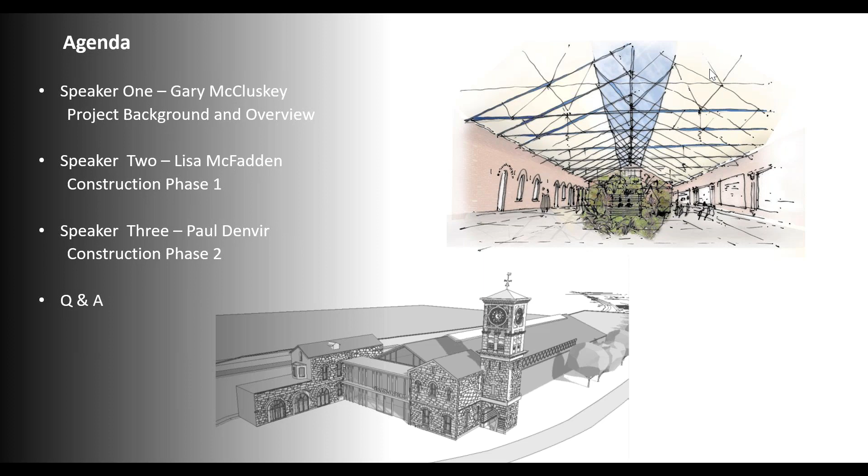So the agenda for tonight: I'm speaker 1, and I'll give you the project background and overview. When I'm finished, I'll pass over to Lisa McFadden, who will take us through construction phase 1. Following on from that, Paul Denvir will take us through construction phase 2. There'll be a flyover and walkthrough of the building as part of Paul's presentation, and then we'll have a Q&A session. So just to give you a bit of background, to give you an understanding of the lay of the land around the site, we've included this slide.

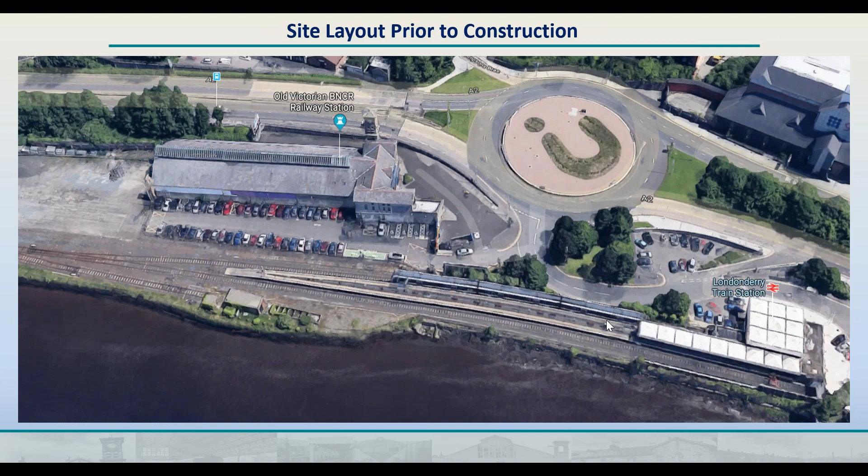Looking over towards the right-hand side, you can see the old station as it was, with all these sort of permanent roofs. You can then see this was an island platform with line 1 running up along here next to the River Foyle, and line 2 - you can actually see the 3-car sets in there. This was the S&T, the Signalling and Telecoms relay room, and then this was the remains of an old tank farm that we had up there at the time, which led to a bit of contamination in and around this part of the site. And then you can see there's an old siding coming into that area as well. So that's just an overview of the site before we started any of the work.

So I'll just give you a bit of project history and a timeline here now. In 2010, TransLink were approached by Ilex to commission a joint study on the future location of the train station.

At that stage, there was no huge big aspirations for us to relocate the train station anywhere, but we did jointly commission that study with Ilex, which then led on to us in 2011 initiating a project mandate. We appointed a number of designers to prepare outline designs to see where the best location would be, and as a result we came up with a number of options which we took to public consultation.

In the latter part of 2012, early 2013, following the public consultation, that led on to us looking into establishing what we'll call a proper project, where we set up the program sponsorship group in 14-15, and then in 2015 we appointed a fully integrated design team. In 2016, we submitted an outline business case for £27.5 million, and we got approval for that.

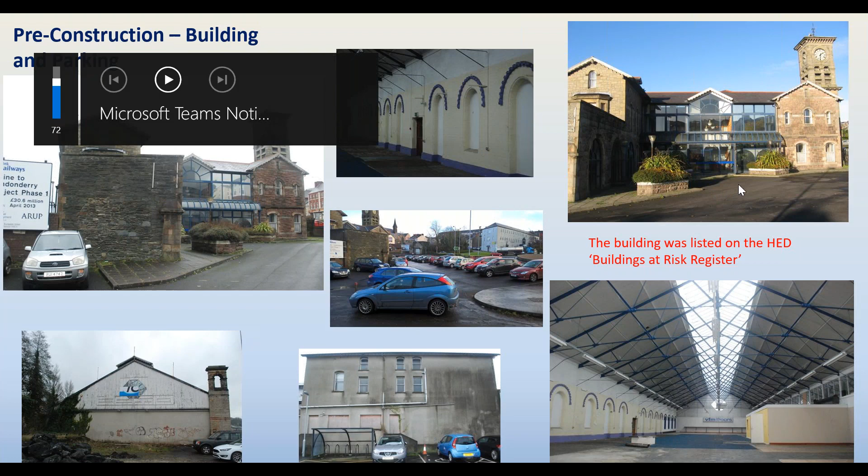And then if you look at this central photograph, you can see there were cars illegally parking, driving up over the footpath and onto the forecourt of the old station. In that top right-hand corner, I counted 25 cars parked in there one day. And then this is the back elevation that was open, as you've seen on the previous slide, where the trains and the platforms used to come into the building. So it was definitely in need of a lot of work.

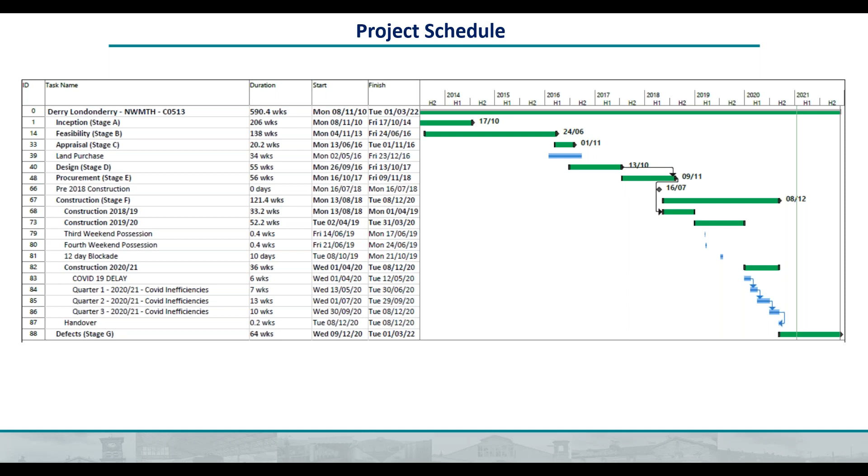I won't go into the rest of that because it'll be happening in Lisa's and Paul's talks later on in the presentation. Just looking at the procurement strategy that we agreed on for the professional services, as Katherine was saying in her introduction, this was a huge multidisciplinary team with an awful lot of elements within it.

So the procurement strategy identified an integrated design team approach to manage multiple professional services. There was a two-stage procurement process, PQQs and ITTs. It started off from principal competition and then went on to secondary.

So McDonald were appointed as the integrated design team economic operator. The decision was made at the time that we wanted as many professional services within that overall IDT team as possible. That even included all the surveys associated with planning applications and building control, and whatever else was needed to get a fully detailed package to the main contractors and then to tender.

So as I say, McDonald were the overall design team leaders. They carried out structural, civil engineering, mechanical and electrical engineering, S&T designs up to GRIP stage 4, permanent way designers. They were the NEC 3PM, they were also the NEC site supervisors, and they carried out the Novo Devo through their sister company, MRA.

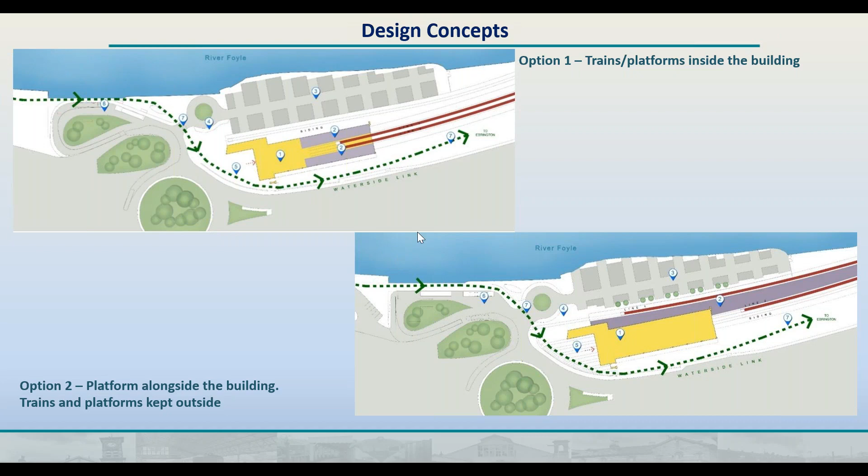So we considered and appraised them both. I'll go on to the next slide — oh, I went too far, sorry, let me go back here.

As part of this scheme, we wanted to open all of this up as much as we could, which gave us the opportunity to incorporate a bus turning circle beside the station, which we never had before, because you could never take buses in due to nowhere to turn them. There was an awkward single-lane entry to the front of the old station, so during peak times with high passenger numbers, there might have been 2 or 3 buses sitting around blocking up this road. This allowed us to create an entry into the site with an internal turning area, where you can come in, turn, and passengers can be dropped off or picked up without blocking up the whole of the park and ride.

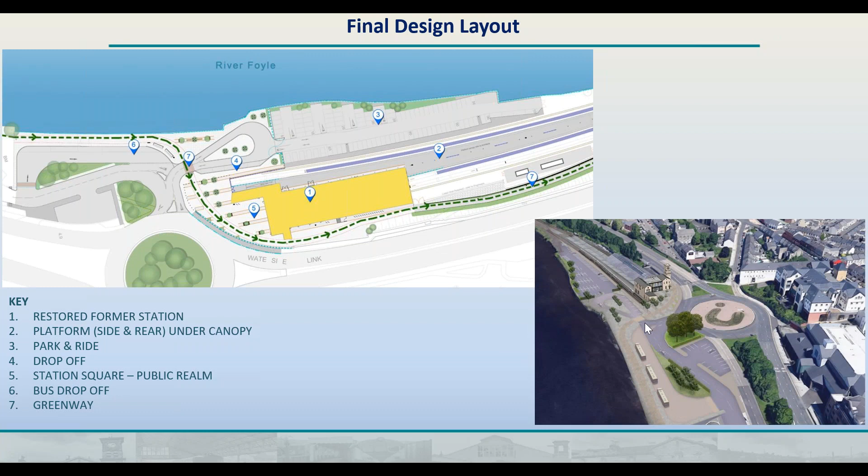As I was saying, this is a Grade B listed building, so we were fairly constrained in what we could do here. We had to keep all of the external walls as they were. So the external envelope of the building, with the exception of this front infill bit, is all as it was - we just cleaned it up, repointed, and fixed windows and things like that.

The design keeps the active travel towards the front so people could come in and out without having to go through the main part of the building. When you enter, we located the cafe here to maximise the views out over the River Foyle, with the food prep area, and then this is all back of house for NIR staff, because we need direct access in and out of the platforms for obvious reasons.

And then down here we have the toilets - a disabled toilet, a parent changing room, a changing places toilet, male and female. And again, there's another active travel unit there with direct access out onto the Greenway.

And then we have this huge area down at the back of the building where we included 2 internal planters - you'll see some photographs of that later in Lisa's presentation. There's a big area down at the back here used as a passenger waiting area, but it can also be converted for public events, with flexibility in terms of services, water, power and electric.

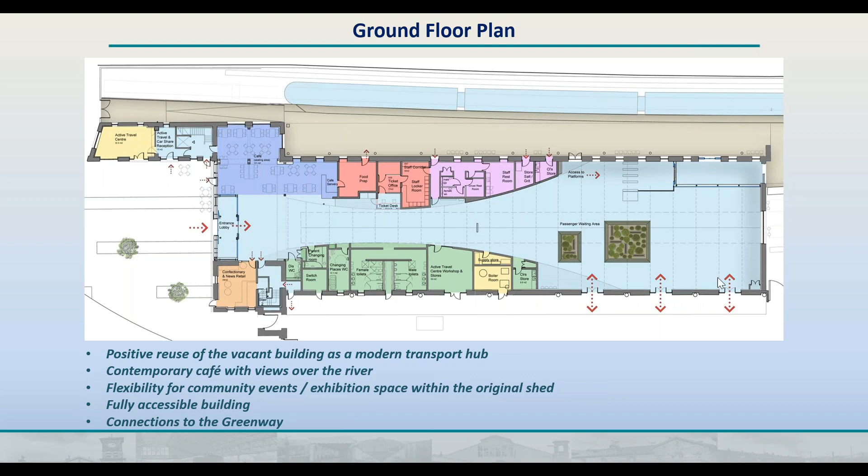And that can be used, and just before COVID it was fairly well used actually. And then we've got these set of 3 doors here with direct access out onto the Greenway.

So this is the overall layout for the Greenway path itself. As shown earlier, it's coming down at the back, the new bus turning circle along the front of the building, down along the side, down along the bottom of that embankment to the Waterside link road, and then right up here, connecting into the existing Greenway in front of Ebrington. So we were able to move the Greenway away from where it was, up at the top of the dual carriageway, Waterside link.

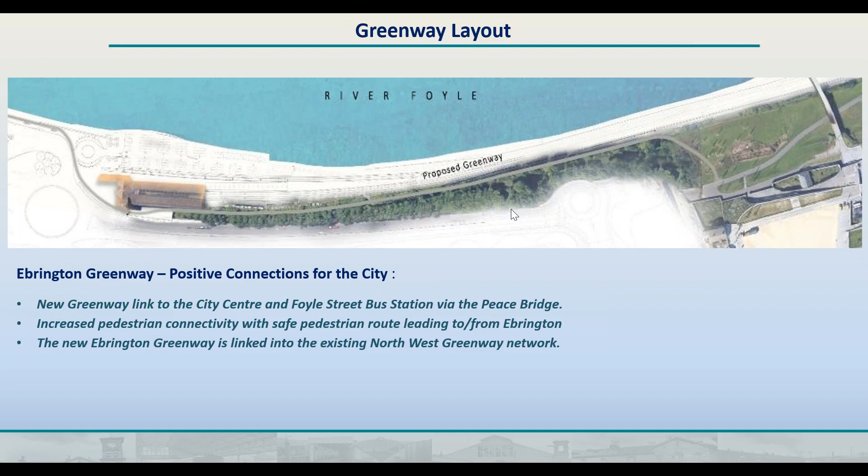Moving on to the huge amount of public and stakeholder consultation carried out within this scheme. This was a fairly sensitive project with an awful lot of interest in the North-West area. As I mentioned earlier, in 2013 we carried out a public consultation and got almost 1,500 responses - 92% of respondents were supportive of implementing a new train station, and 64% were in favour of refurbishing the old vacant station.

We included 4 overall options within that public consultation. One was to refurbish the old station - not the original, but the one we actually demolished that I was showing you earlier - or to build new. The other was a new contemporary option, and then there was another elevated option over the top of the railway lines, at the side of the Waterside link dual carriageway. But by far, refurbishment of the old vacant station building came out as the most favourable option.

In 2016 to January 17, as mentioned earlier, we carried out another full public consultation on the preferred option we were going to submit to planning. 98% again supported the principle of a new North-West Multi-Modal Transport Hub, with 92% agreeing it was appropriate to reuse and refurbish the former Waterside train station.

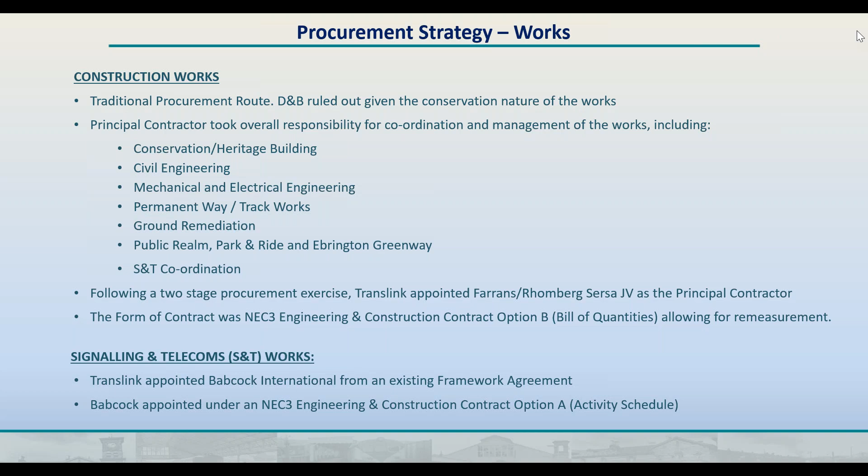So that just brings me nicely into the start of the construction works on site, phase one, and this is where I will hand over to Lisa McFadden.

Thank you, Gary, and good evening to everyone. I'm going to give a short overview on the construction phase when I worked as project manager. This was really from October 2018 to October 2019 when we commissioned phase one and went into operational use.

The 1980s insertion with modern glazing at the front, with art at the backdrop, helped showcase that this is a modern transport hub for today's use.

Also, through inception stage, there were changes such as new legislation or new standards of ways of doing things. For example, we introduced a changing places. Also, we looked to retain the modern elements that we had to provide, fit for use for today. This includes retail opportunities like a cafe overlooking the River Foyle and the city beyond. And what we touched on earlier is a key feature was a flexible community space within the passenger area at the back of the station.

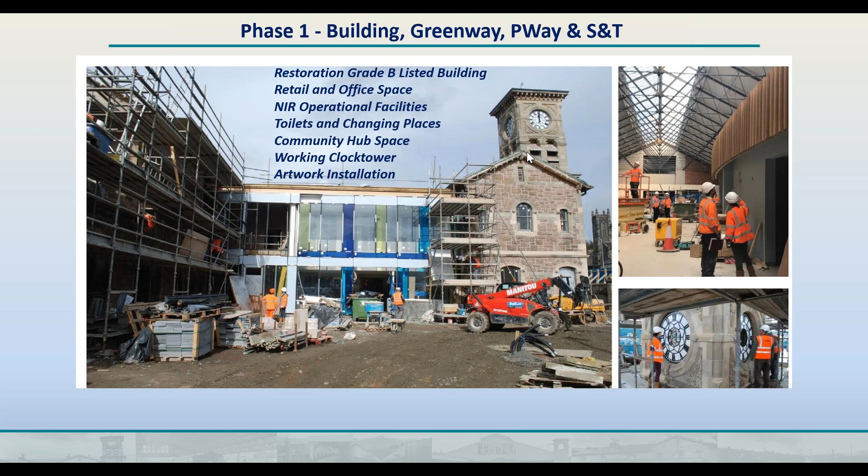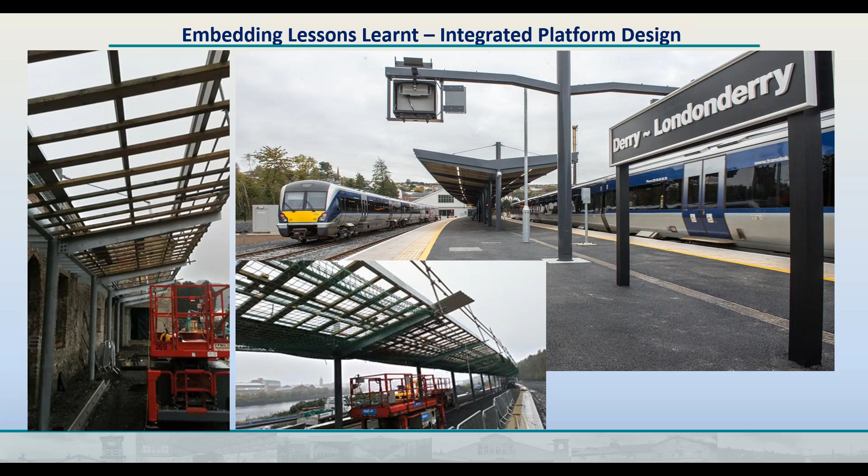However, making the canopy work, we had to step around the building and integrate the M&E services with bespoke down pipes. So as a construction team and delivery team, we really had to work together to make something very clunky from a joinery and construction point of view look elegant at the very end.

It wasn't just a building project in phase 1. There was a lot of PWay, which is track works, and S&T works, delivered by Babcock. The PWay was Rhomberg Sersa and the S&T was Babcock. We had 1.8 kilometres of new track to lay.

There was 6,000 metres cubed of spoil, and 6,500 metres cubed of new ballast. We had safe cess walkways, which run up beside the track for future maintainers, and cable troughing throughout the length. We had a significant number of new S&C points installed by Babcock, and PSP and relay rooms sitting to the right-hand side of that photo.

We used one-train working to try and get works carried out within a very tight timeframe. What's interesting is this whole project was completed without any engineering trains - all materials came by road, with one access point over a very long, narrow constrained site. It was delivered with 0 minutes overrun, and therefore no further impact on railway operations.

So you could say, how did we do this? Forward planning is always key when carrying out your PWay and S&T works. It's very important that we book and agree blockades with our NIR colleagues, and these were embedded into the contracts. One of the main blockades was in October 2019.

This is where we had 12 days prior to opening to cut the old PWay into the station - basically no turning back - and put in the last piece of the jigsaw, the new PWay that connects into the hub. That connects into the island platform that Gary pointed out earlier, where I actually had the capacity for a 9-car set if needed for the future in Translink.

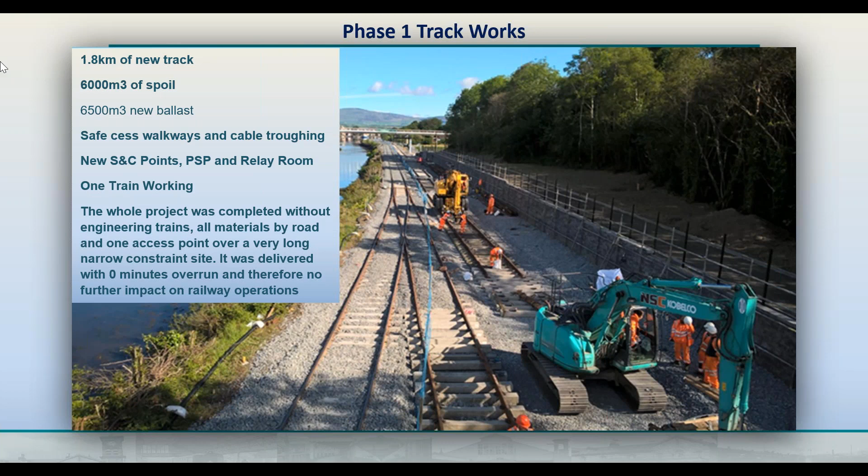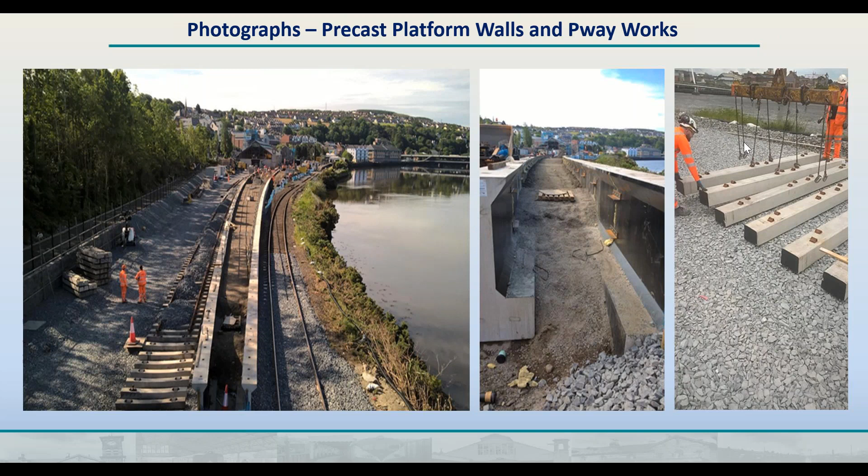Farrans were working right up to the clock for operational readiness, which was the 21st of October 2019. Farrans carried out a lot of the structural works, steel frames, needle beams, etc. But the key part was the functionality of the building, the S&T, the M&E that goes into it, but it's the look and feel at the end that the public and customer focus on. So this was quite key as well.

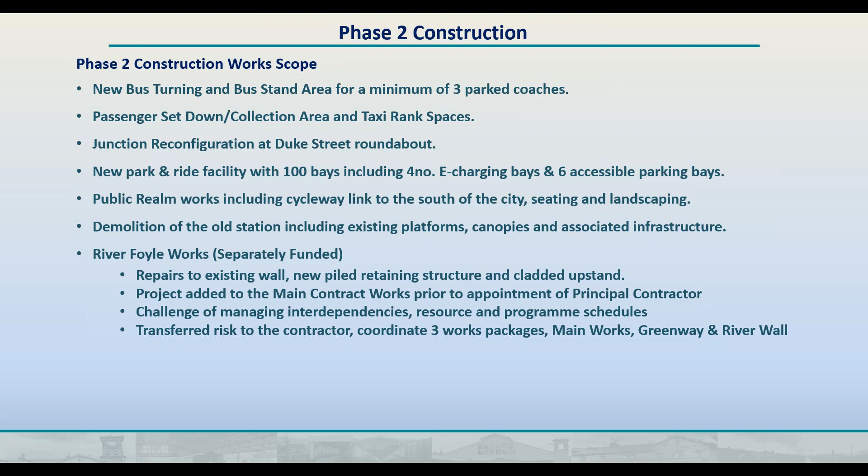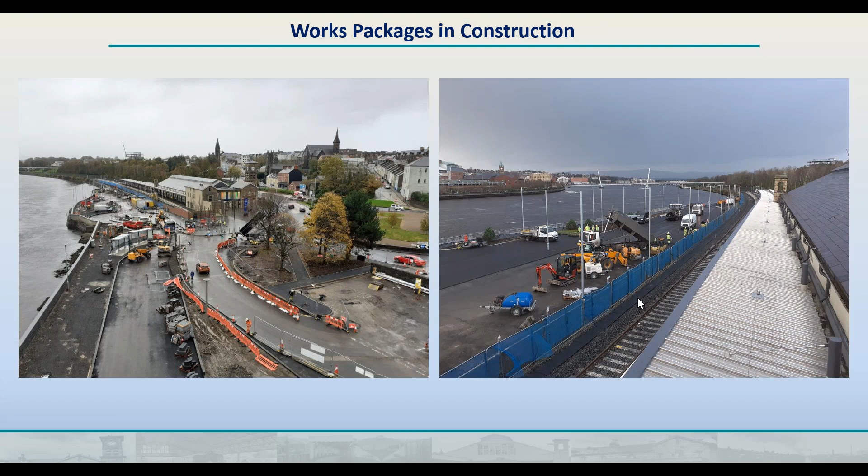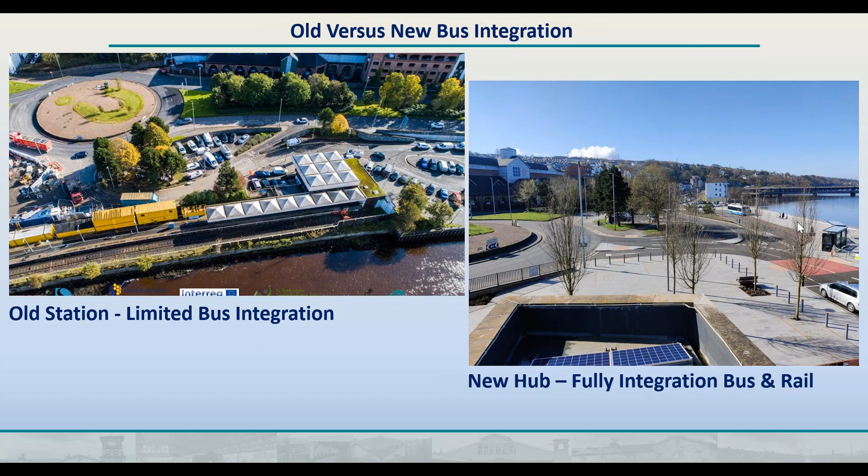I think you can see on the right hand side picture here, this is a picture taken from the 2nd floor of the new station. You can see the buses have a large set down area. You've got covered bus shelters, a taxi rank, and you can see a taxi just parked here. And then the whole public realm area and the River Foyle just brought completely back into play, which I think's a great asset for the Waterside of the city.

So just to move on, project completion, some key lessons learned from all phases of the project. I think the most important thing was good collaborative working.

I'm just worried of the time here actually, so it's 7:30, but if you can, it's worthwhile holding on, because we've got a nice video and a virtual tour of the station we're going to show you just after this. I've only got probably a couple of minutes left of the presentation.

So key lessons learned were collaborative working, key stakeholder cooperation approach to project delivery. Lisa and Gary have alluded to the fact that we worked closely with the Derry and Strabane District Council in the delivery of the Greenway, and by all accounts it's been a massive success story for the Waterside area of the city. The target for the Derry and Strabane Council for yearly footfall on the Greenway was 50,000 journeys. At the minute we're forecasting well over 250,000 journeys, so a 5-fold increase on what was expected. I think the collaborative working with the key stakeholders was a massive success in the project.

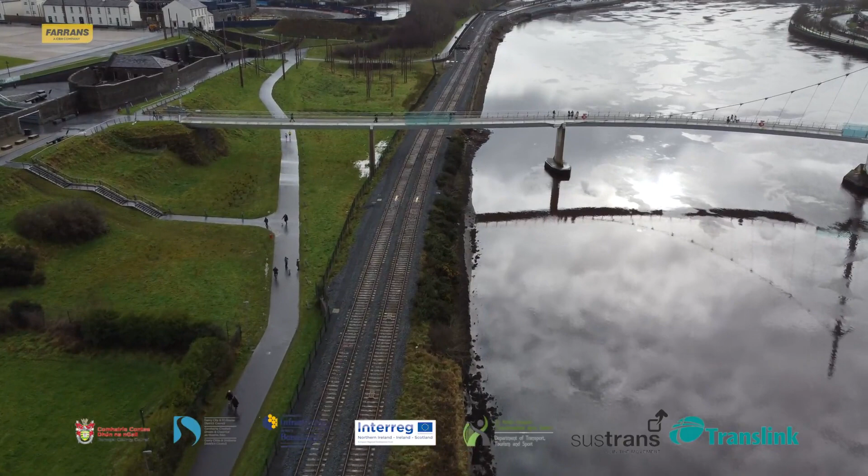So this is the existing Greenway that we tied into, the Greenway that we got the money for from Derry Strabane District Council. You can see here the two lines coming in, the passing loop, which goes out to lines 1 and 2. This is the Peace Bridge, so now we've got connection to the opposite side of the city, and also the Greenway, which we'll see coming in a second.

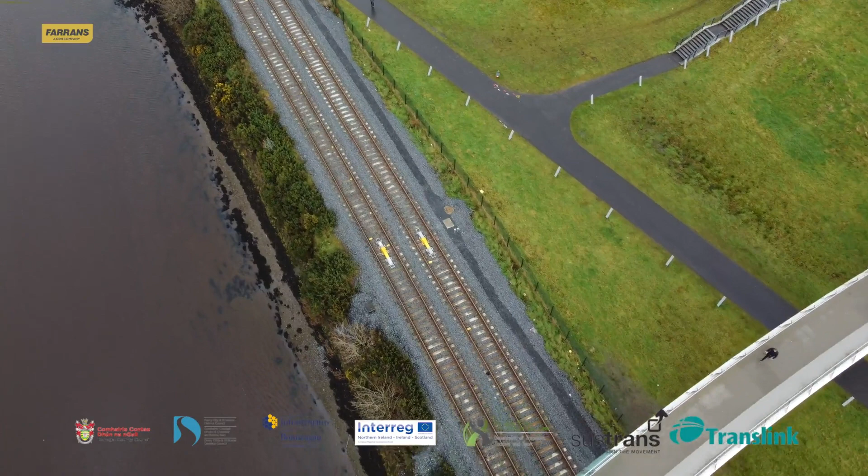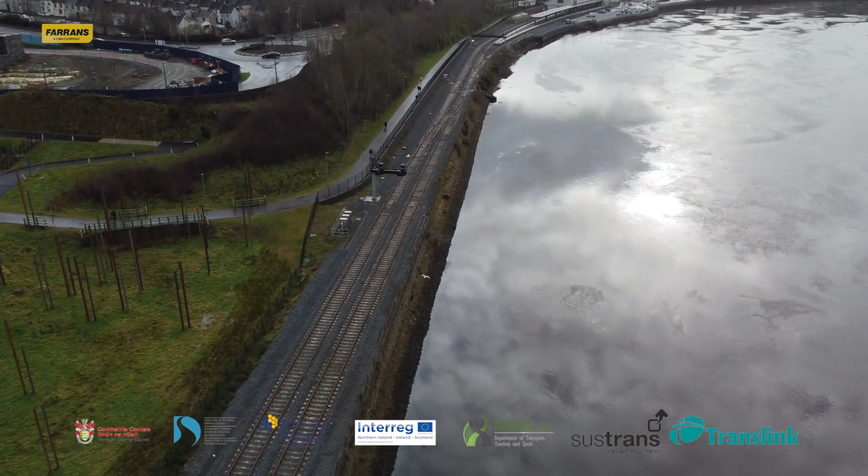This is where the new Greenway ties in, and makes that connection from the south side of the city, the Peace Bridge.

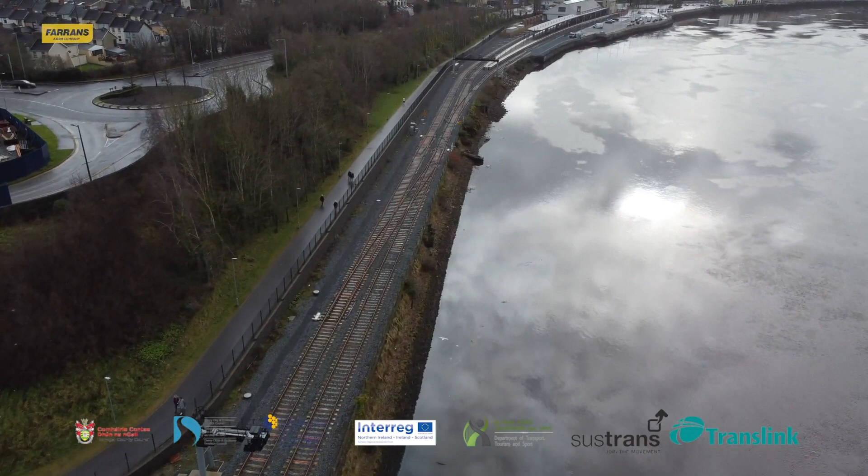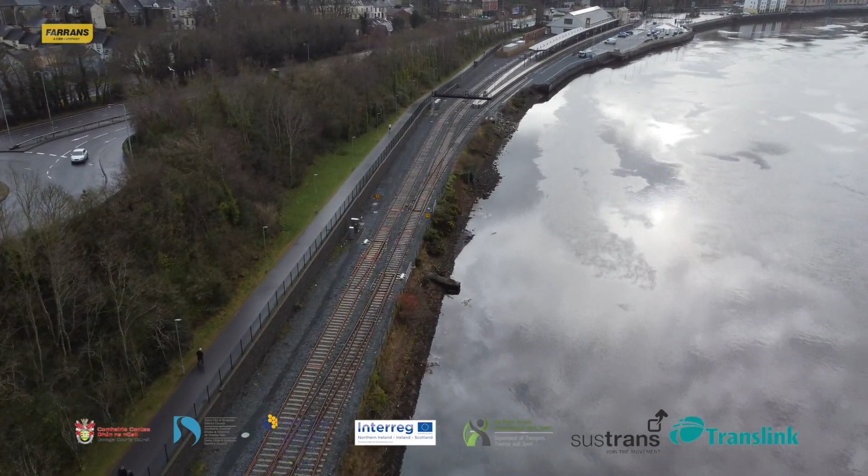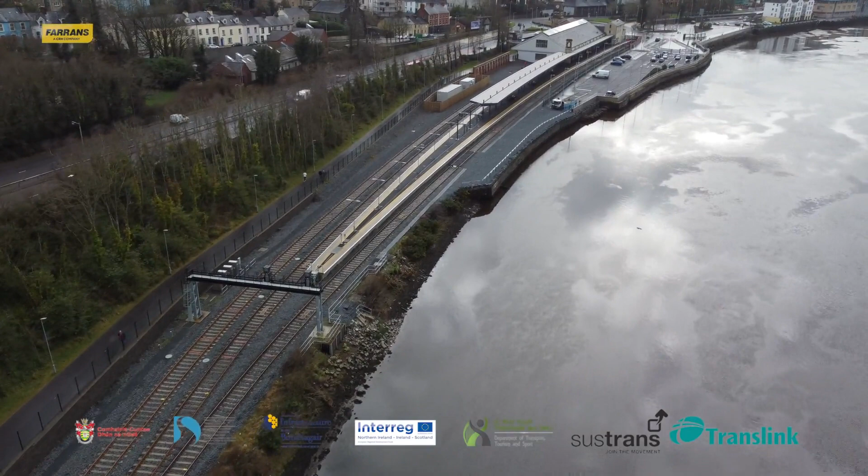The Greenway is quite well used. Earlier it was 20,000 journeys, really effective. I think it's close to 30,000 per month now. So basically it's free to the city, the council involved.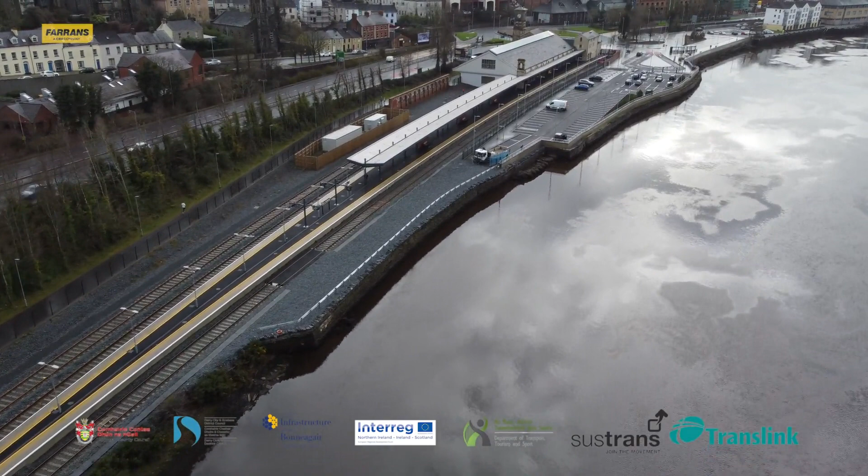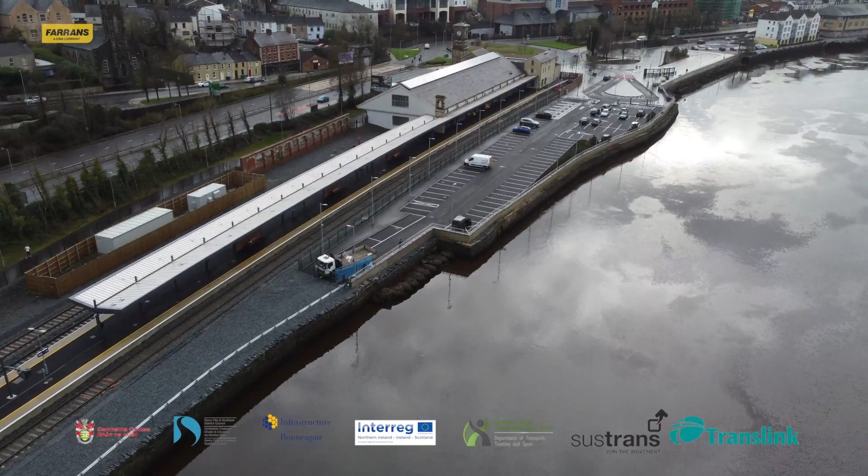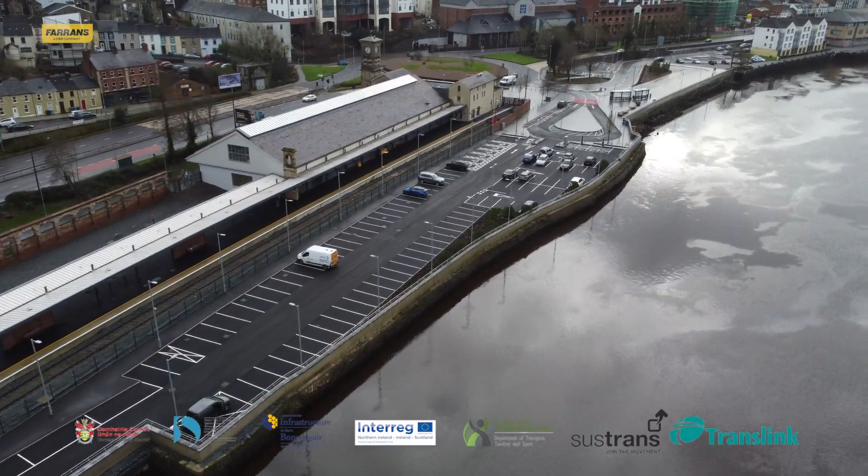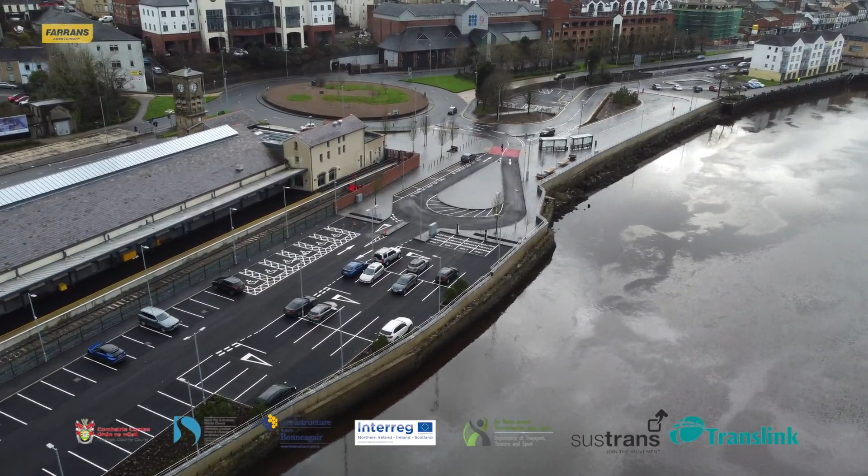You can see here the island platform from the view and the canopies we've installed. We've got the parkway here. We've also got the PWay storage area, again working tidily. Just here you see the river wall, which runs all the way along the top through the whole site, and the river wall is still in place. It was actually quite damaged, so we had to tie the wall.

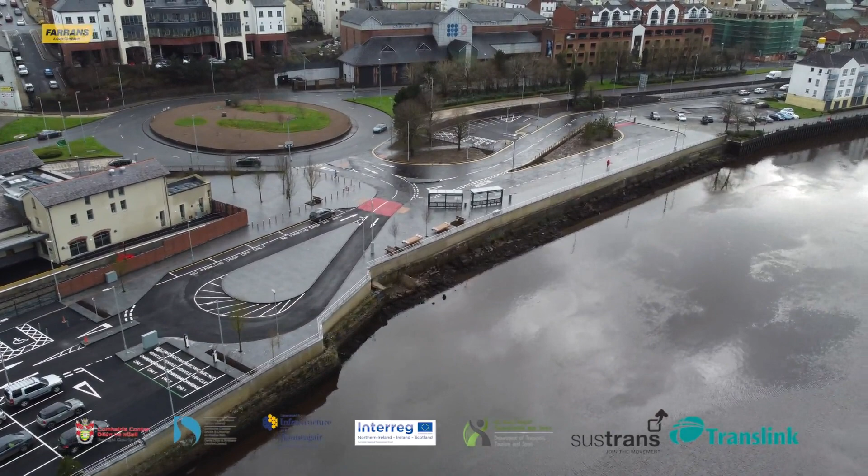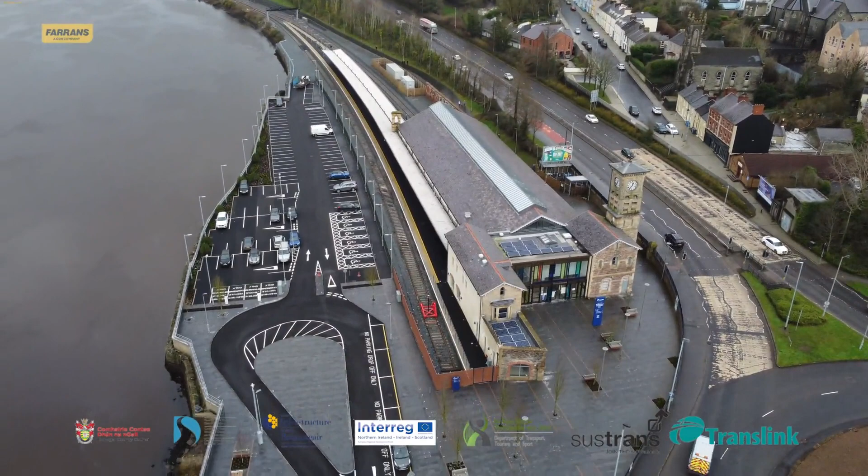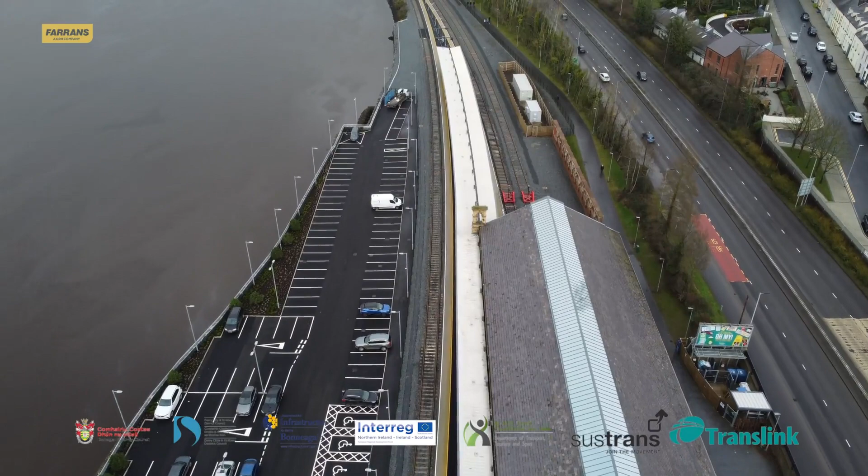You can see the drop-off area here, the taxis and the delivery, and then also the drop-off here, and then the south side of the building. Just coming around from the building, you'll see the station square, the back end of the S&T equipment, the relay building and the generator.